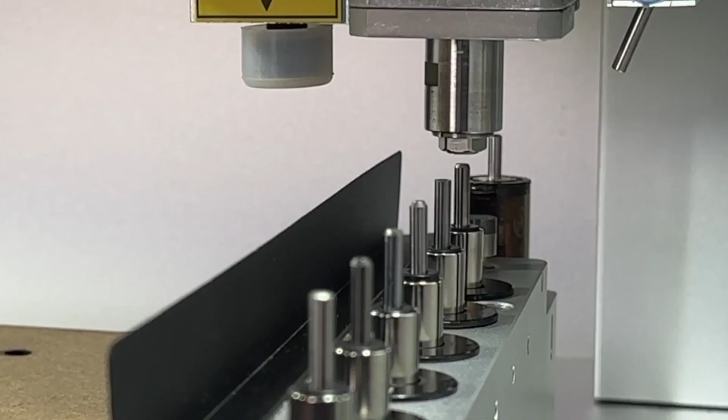In this one, we're looking at how to create a slide card style fidget toy using the Carvera and Makera CAM. Using the Fidget Toy Tool Kit available in our store, you can manufacture a wide range of fidget toys using your desktop CNC and the materials and bits included in this tool kit. Through this tutorial, we're looking at how to make a slide card style fidget toy, which will involve some intricate toolpath design for a multi-sided metal project.

You can choose to design your own CAD files for this project, or you can download the 2D CAD files that I'm using in this tutorial from the knowledge sharing page on our wiki site. You can, of course, download the CAM files from the wiki page too, but through this tutorial, we're going to look at how to create our toolpath step by step to make this project using Makera CAM.

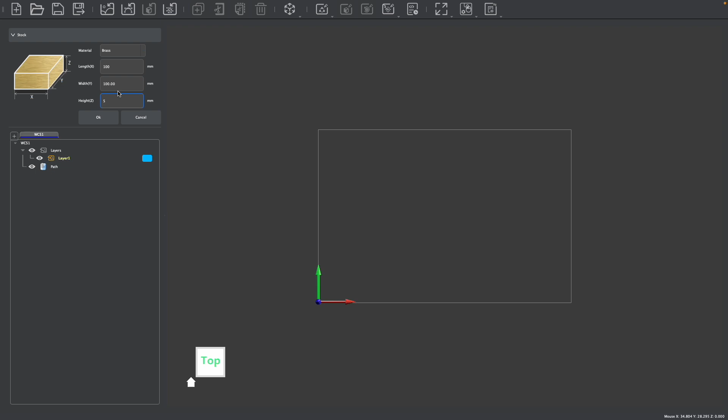So let's get started. After launching Makera CAM, the first thing we want to do is set up our stock parameters for this project. So we can edit our stock, and you can choose whichever material you're going to be working with. I am going to use brass, a piece of brass stock that's 100 millimeters in length, 100 in width, and 5 millimeters in height to create this fidget spinner from the fidget bundle pack that you can find in our store, as mentioned earlier.

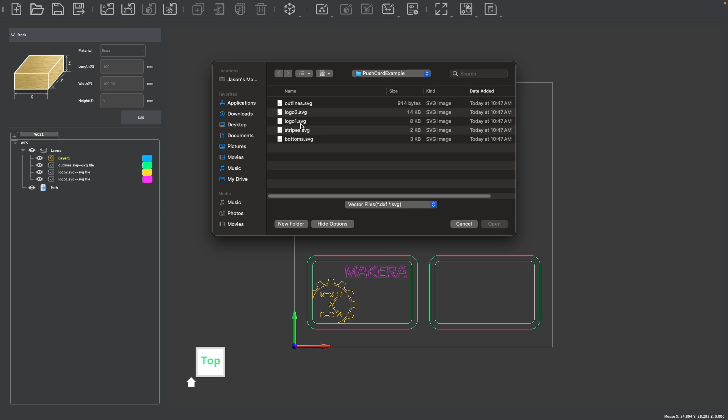After setting the stock parameters, we then want to import our files. There's a number of files that we're going to need to first create the top of this fidget card, starting with the outlines file, followed by the logo files, which there are 2, and then the stripes file. We won't need the bottom file for this side, but we'll get into that when we actually flip our stock over and manufacture the bottom.

Now you'll see that all the design files aligned perfectly because they were all designed together and then exported in a CAD program. But you could, of course, use center to center to align your design files if needed, as discussed in our other tutorial videos. Now, the first thing we're going to do is create our stripes, and the stripes are going to be manufactured using this stripes file.

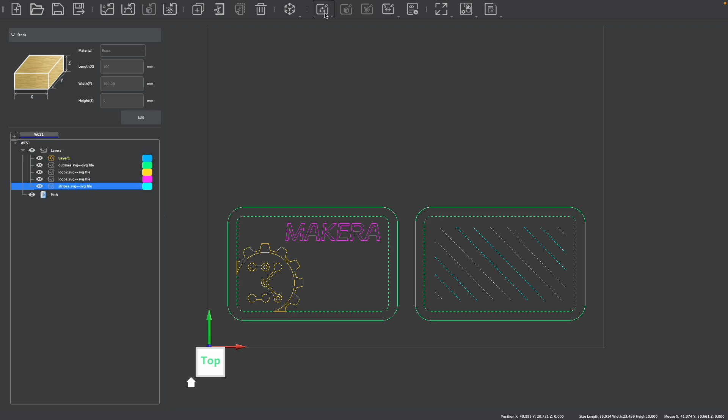You can select the entire design by hitting Select Graphics using the Layers panel here. And we're also going to create an outline stripe as well, so I'm going to hold Shift on my keyboard and select these 2 inner outlines. That's actually selecting things from 2 different layers, but that's perfectly fine as we want to create our toolpaths using the same parameters for these design features. So with the parts of our design selected, we can then create a vector contour toolpath.

And one thing that we're going to do differently for this project is we're actually going to start machining in the negative. So I'm going to start machining above my stock at negative 0.1 millimeter. The reason we want to do that is we want to ensure that our stock and our project is cut perfectly square.

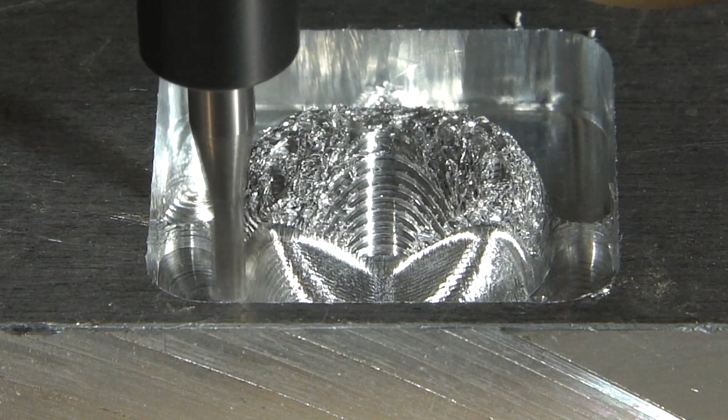In another video, we talk about how to use the Carvera's auto leveling feature, which will automatically adjust the Z height during machining to give you an even cut. But let's say that your stock is slightly uneven, not perfectly square, which is very common for extruded stock. Then the cuts won't be perfectly square. They'll actually be square in relation to whatever the deviation is on the surface of your stock.

By starting your machining depth above the stock, the Carvera will begin the toolpath above the stock and then gradually decrease into the stock, giving you a perfectly square cut based on the machine's square axis gantry. This is really important when you want to do parts that fit well together, like our fidget slide card. So we're going to start at a depth of negative 0.1 mil, above the stock, and we're going to do a depth of cut of 0.4 mil.

Now, you don't typically need to adjust your safe positions unless you have some type of jig or fixture that you're working around. For the tool, we're going to select our 1.5 by 6 millimeter end mill in our metal bit, and our parameters for brass should automatically be selected. In this case, we are not going to adjust any of these parameters. These are perfectly fine, but you might want to consider adjusting the tool number depending on where you have this tool loaded.

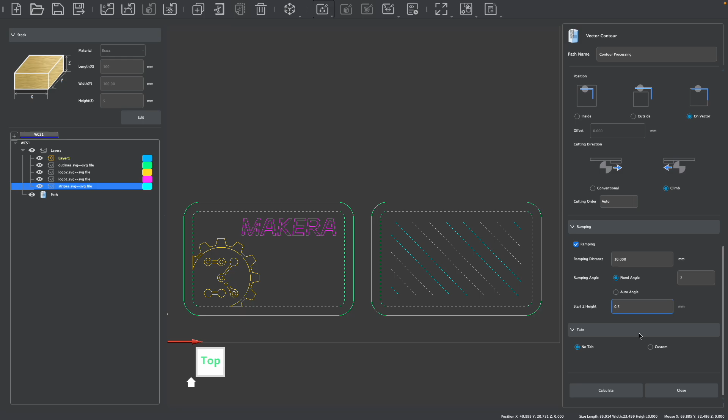So for ramping, a good distance is usually 10 millimeters for something like this. And we can do a fixed angle of 2 degrees and a start height of 0.5 millimeters. No tabs are needed, of course, because this isn't a contour cut that's going to go all the way through. So we can go ahead and calculate our toolpath, and we should be able to see our cut strategy, a nice little design cut there into our stock. Let's close this, and we can then move on to our next toolpath.

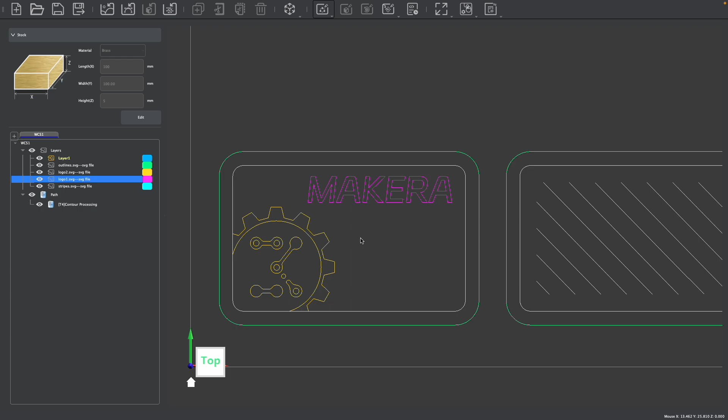And this one is going to be a pocket toolpath for our logo graphics. So we're going to select all the graphics on our logo layer. And in this case, one of the best ways to do this might actually be hide all your layers and your toolpaths except for what you need, and then go ahead and drag a box and select all the graphics across these 2 layers, like so. Then we can go ahead and create a vector pocket toolpath. So we can machine out this design using a pocket strategy.

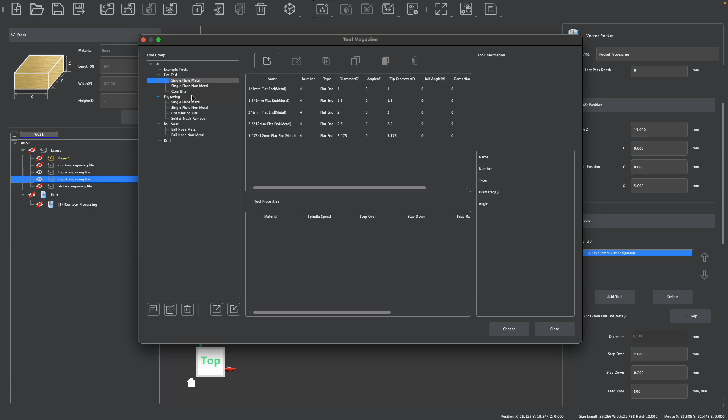Again, we're going to start above the stock, so negative 0.1 mil, and the end depth for this will be 0.4 mil again. We're also going to enable a last pass depth, and what that will do is essentially enable a finishing pass at whatever our step down is set for our bits as we go. Speaking of bits, we can go ahead and select a different tool. In this case, it's going to be an engraving bit for metal, such as the 0.2 millimeter by 30 degree V-bit, which would be perfect for machining a nice detailed design like this.

Again, our brass parameters will be set automatically based on our stock. You'll see that the previous tool that we were using is still here. That's if you did want to do a multiple clearing path or like a rest machining type path. In this case, we don't need to do that. So I'm going to delete this other tool so that way all I have is my 0.2 mil by 30 degree engraving bit. The default parameters should be fine, but again, you might want to consider adjusting your tool number based on where you have this tool loaded in your tool changer if you're using the Carvera.

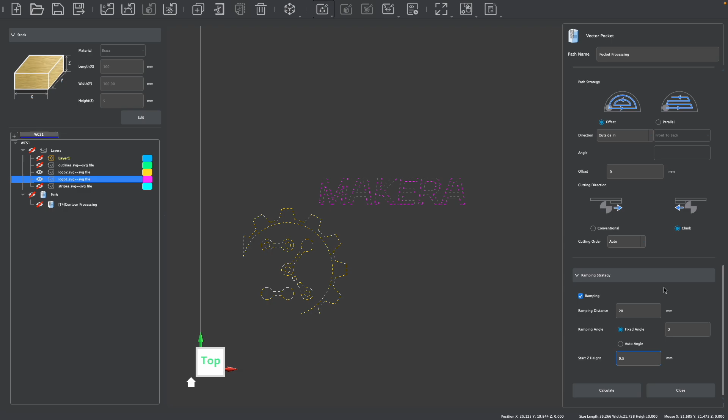For our strategy, offset and the default parameters of climbing should be fine. And again, we're going to enable ramping. This time we'll ramp for a slightly longer distance as we're working with a smaller bit here, and we don't want to break the tip, just to give us a nice, more gradual entry. So we'll set ramp distance to 20 millimeters, 2 degrees is still fine, and a start height of 0.5 millimeters is still fine, and a good general strategy for this. We can go ahead and calculate. And we can see our pocket path generated within these logo designs. So we can close this now.

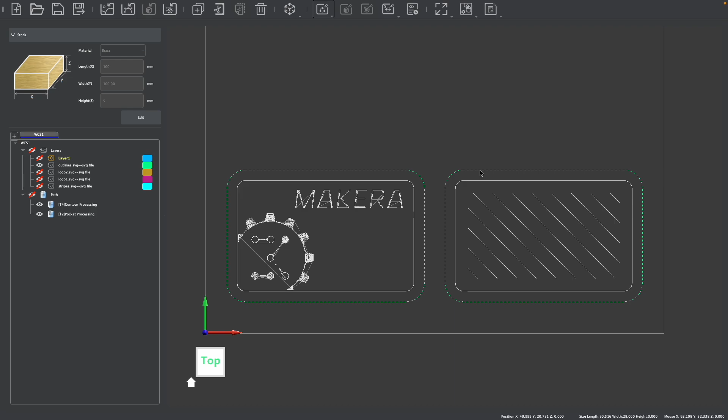And if you want, you can actually enable your contour path as well, so you can see how the 2 toolpaths we've created thus far will align. And I'm going to go ahead and hide our logo design files because we won't be needing them. And then we can enable our outlines design file because the next thing that we're going to do is follow along with this outline and begin to cut the outer perimeter of our fidget toy. We're not going to cut all the way through on the top because we are going to flip our stock over, but we're going to begin to cut in so that way we can create a nice chamfered edge for the top. And then through some alignments, we'll be able to make sure that the top cuts align with the bottom cuts. So let's select our 2 outlines and then create a new vector contour toolpath.

Again, we're going to start from a depth of negative 0.1 above the stock. This time our end depth can be 1.5 millimeters. So not all the way through, but deep enough that we can start to cut the outer edge. For our tool, we can switch to a larger tool, such as a 3.175 by 12 millimeter flat end mill with brass set as our machining parameters.

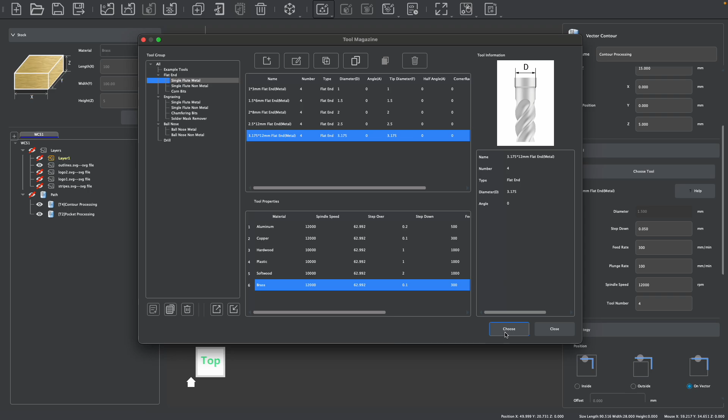Our default parameters should be fine for brass as we work here, but you do need to change your tool number if you have a tool number set that we've already used. So for example, I'm using tool 4 for my smaller flat end mill. So I'm going to switch this one to be tool 5 as you go. And that's important to do whether you're using the Carvera with the automatic changer or even the Carvera Air, so that way a tool change will be prompted to a different bit.

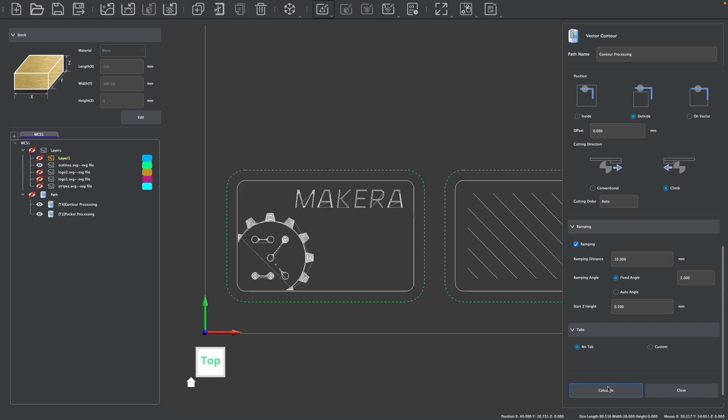For our strategy, we're going to run along the outside of the contour. No offset and climb is fine. And again, we will have ramping enabled, and we should have our default parameters that we set earlier on with a distance of 10, an angle of 2, and a start height of 0.5. So let's go ahead and calculate this, and we'll see that we have this outer cut set. And if we rotate, we'll see that we don't go all the way through, but we cut deep enough that we can start to machine a chamfered edge as well.

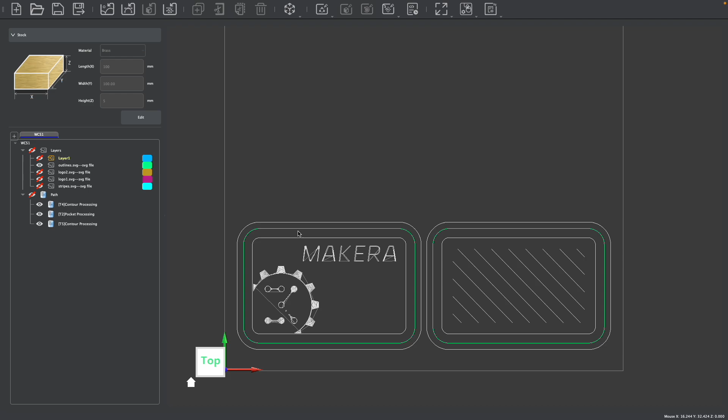Now, the last thing that we have to create for the top of our design in terms of the fidget toy is a chamfer to give us a nice smooth edge to work with. So let's go ahead and select those same outlines again. And let's go ahead and create a contour toolpath again. And for this one, the start depth is actually going to be within our stock because we've already begun to manufacture this path. So we're going to set a start depth of 0.2 and an end depth of 0.6.

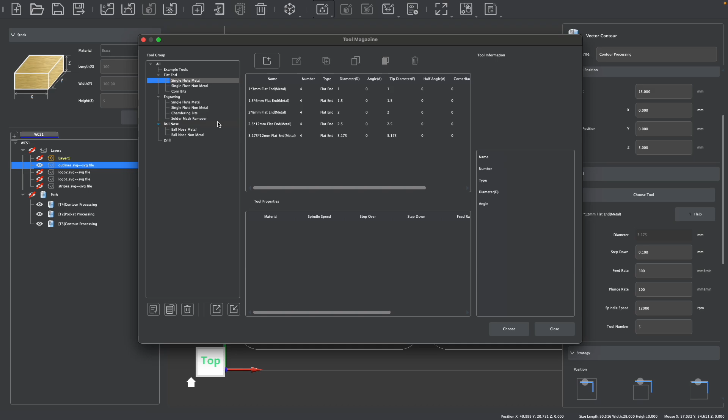For our tool, we can go ahead and select our chamfering bit, which in this case will be a 0.1 millimeter by 90 degree chamfer from our examples pack with brass set as our default parameter. The default feeds and speeds should be fine, but check your tool number to make sure you're in a different slot. And the key about a chamfer is you typically want to run along the outside of your toolpath like a contour cut, but you also need to offset the chamfer bit. The edge of the bit will be over the line, and that's what creates our chamfer cut. And this offset is what can set the size or the depth of your chamfer.

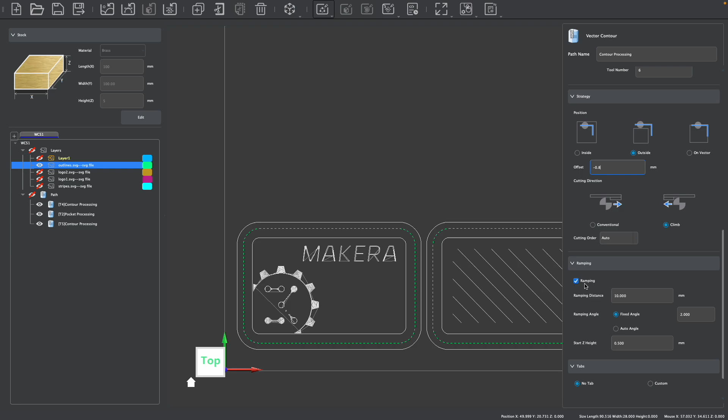So for example, we're going to offset negative 0.8 millimeters, which should give us a nice even and small chamfered edge for the size chamfer, or 3.175 millimeter diameter chamfer bit that we're working with here. Climb is fine, as with before. And for the chamfer, we actually don't need to enable ramping. Once we calculate, we can see our chamfering bit running along the inside of our line here.

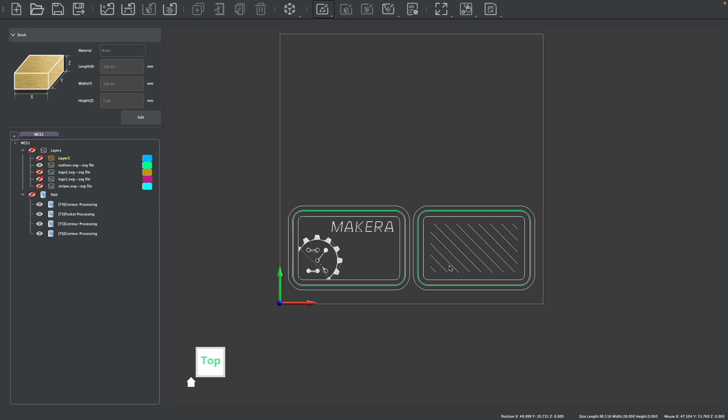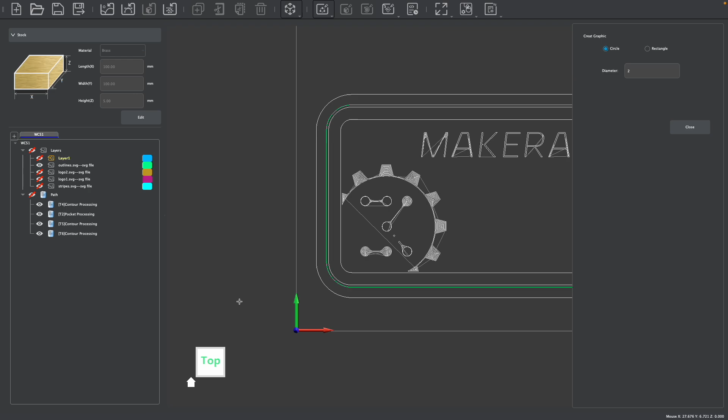All right, now the last thing that we need to do for our top side of this project is to give us some alignment pins, so that way when we flip the stock over, we can be confident that the stock is aligned with the top design and the bottom design, which is super important anytime you do a multi-sided project like this. So we're going to use the Makera CAM create feature to create some holes that we'll put alignment pins in later. The diameter of these holes can be 2 millimeters, and the position of the first hole is not important. So we can go ahead and just draw it somewhere in this lower corner here, like so. And you'll see that this was drawn on our first layer, which was the active layer.

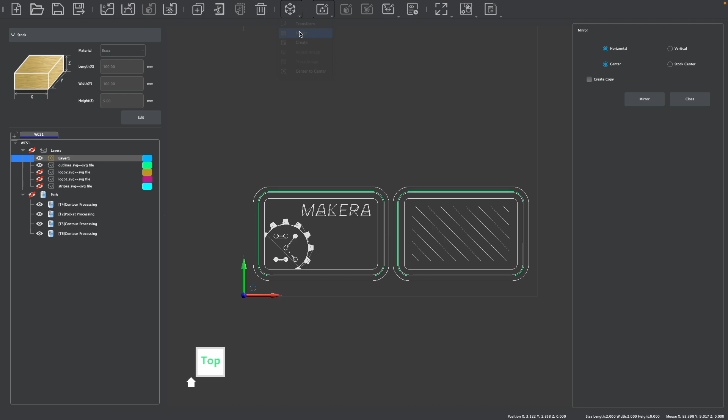Now, we need a second hole on the other side of the stock. And there's a couple ways we could do this. We could actually transform this hole using the transform window and set the position to be specific off the corner, and then kind of do some math to make sure it's in the exact same position on the other side. But there's a much easier way to do this in Makera CAM, and that's by using the mirror tool. So what we're going to do is we're going to mirror this hole, but rather than mirroring it off of its own center, like the center of the hole, we're going to mirror it off of the stock center.

So that way, this is going to find the center of our stock, and I'm going to click Create a Copy, and when I hit Mirror, a second hole is going to come to the other side, the right-hand side of the stock, and it's in exactly the same position based on the size of my stock. So that means as long as I machine this project on a piece of stock that is 100 millimeters in width here, when I flip this stock over, my designs will be perfectly centered based on these alignment holes. Now, with our holes drawn, we can select both holes and create a vector drilling toolpath.

For this, we can set our start to be 0 millimeters. That's perfectly fine. Our end depth is going to be 10 millimeters to give plenty of space for the pins to slide through. And this, of course, will not only go through our 5 millimeter stock, but it will also drill 5 millimeters into your spoil board or your waste board. So make sure that you have a piece of waste board to protect your bed accordingly.

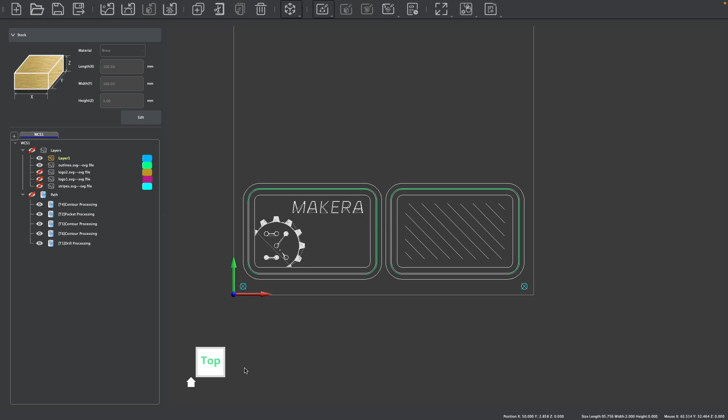We can go ahead and select a 2 millimeter drill with our brass properties selected here. And the default parameters are probably fine, but go ahead and check your tool number to make sure that you have this in the correct location. And we also want to do a retract path. So this is like a peck drilling function. And we can do this from a relative retract distance of, let's say, 2 millimeters, which just means that each drill pass will then back up or retract by 2 millimeters to allow for chip evacuation to make sure that we don't dull or break our bits. We can hit calculate, and then we see our drill path drawn there.

So this concludes the top of our project. So this will manufacture the design and the chamfer and everything like that on the top of our fidget project. And then what we need to do is flip the project over to manufacture the bottom. And you could do this in 2 separate CAM files, but we're going to do it in just one.

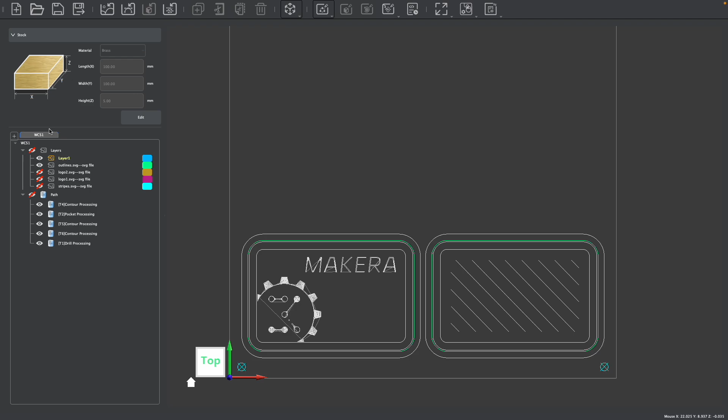So the first thing we have to do is make a new work coordinate system for the bottom of our stock. So to do this, we can press this plus button here to create a new coordinate system, which I'm going to call bottom. And then we need to select the origin point for the bottom coordinate system. And you can see that the default origin point is, of course, the bottom left corner here. So we want to select what the bottom left corner will be after we flip our stock.

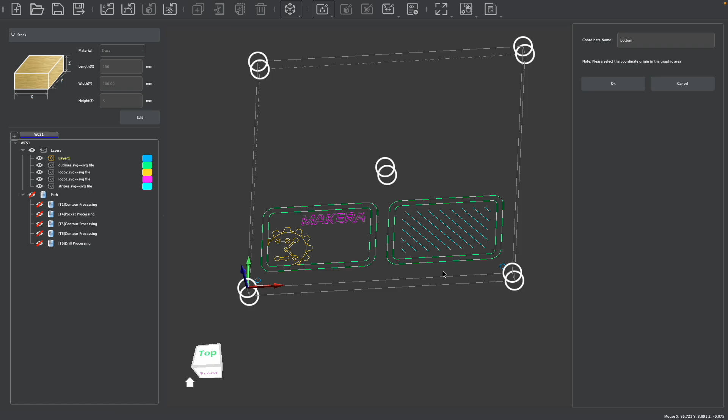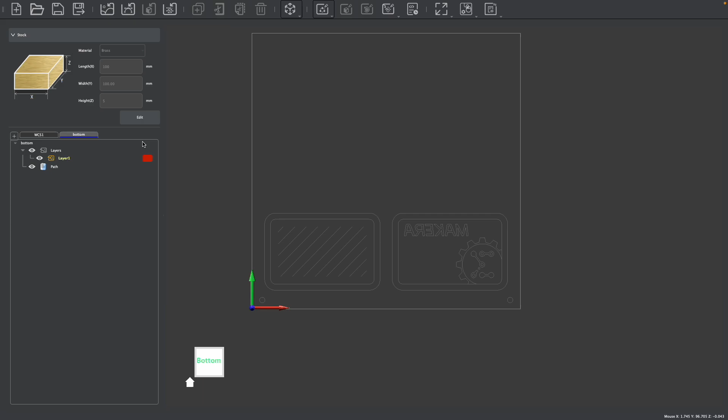And if I rotate my stock around in a horizontal direction like this, which is how it's going to be flipped, I can see that this corner will actually end up being the bottom's bottom left. So we want that to be our origin point for our new WCS. And when we press OK, we can see that we've created this bottom WCS, and we can sort of see a shadow of our designs from the top. And I can toggle back and forth between the WCS accordingly.

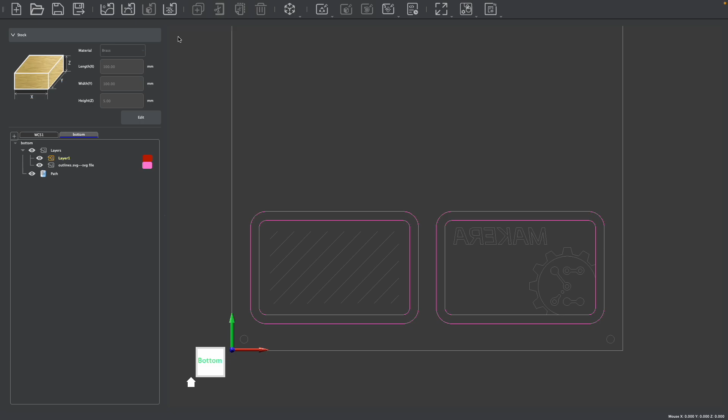So now we need to import the design files for the bottom of our fidget toy. And for this, we're going to need the same outline file that we used earlier. And we're also going to need the design file called bottoms. And again, because these design files were made together, they should align with the tops just fine. But if needed, you could use the center to center feature to align, as discussed earlier on. And now we can move into actually preparing the toolpaths for the bottom.

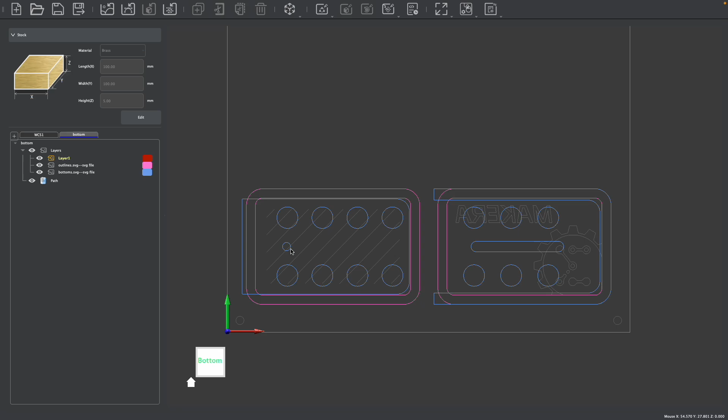So the first toolpath that we're going to create is actually just for this little post here that we can see on the left side. Now this post is going to be what slides in this channel to lock the two pieces of our fidget toy together. And all we need to do is remove a little bit of height off of this post so that way it fits within this groove. So we don't want it to be the same thickness of the stock, so we just have to machine a little bit of material off.

So we've selected this hole and we're going to create a vector contour toolpath. Our start depth is again going to be negative 0.1. So we start machining above, and we can do an end depth of just 0.3. So that's just going to remove 0.3 millimeters off the height of this post. We can choose our single flute bit that's 3.175 by 12 mil. Again, our parameters will be preset, and we shouldn't have to adjust anything here apart from our tool number.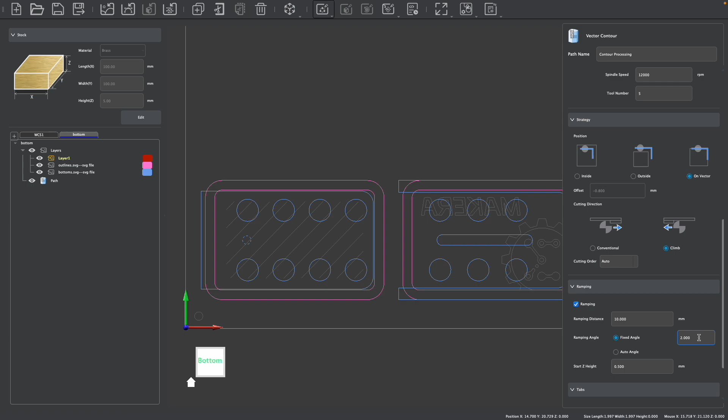Earlier on the top part of this project, I set this to be tool 5, which I'm going to do again, so that way I don't have to move the bits around in my tool changer when I flip my stock around. We can set this to be on vector, just so it will run along the side of this post. And just like before, we can set ramping at a distance of 10, an angle of 2, and a start height of 0.5. After calculating, you can see that it's just going to manufacture this little post here, which again will just remove some height off of our material. Next, we want to go ahead and manufacture this pocket on the left side of our stock.

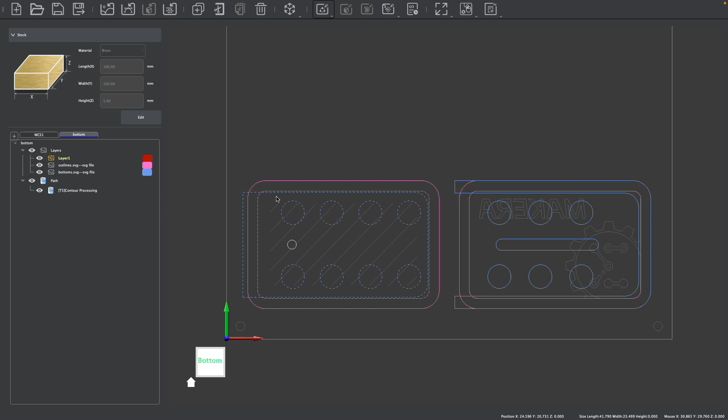So to do this, we're going to select everything on this side, like so. I don't want to grab the outline design part here, just the inner part of this pocket. So I'm just going to hold Shift and deselect that one aspect of the design. And then we can go ahead and create a pocket toolpath.

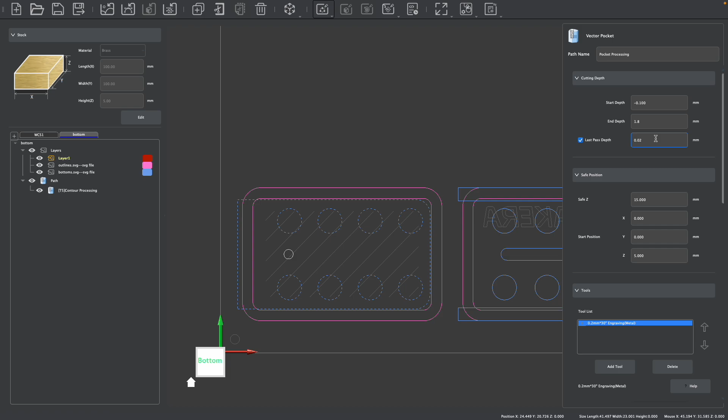We're going to start from negative 0.1, but we're going to end at 1.8 millimeters. We're also going to enable a last pass depth, which again, as we discussed earlier, is sort of like a finishing pass, to 0.02. So that's going to give us a really nice fine and smooth cut here, which is important because this part's going to have to fit in with this part that we machine later.

The tool that we're going to select is going to be our 3.175 by 12 millimeter bit, which we again want to set to tool 5. And that's going to start our clearing path. We don't need to use our engraving bit if you have this already there. So I'm going to delete that. So all I have is my 3.175 by 12. And that's going to start this.

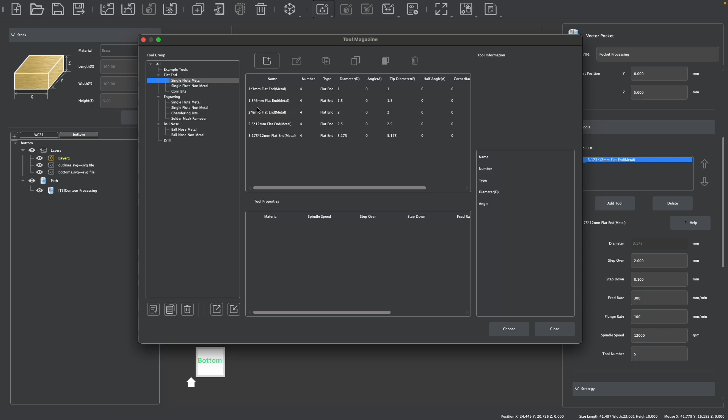But this bit is too big to fit into the fine details, into the corners for this. So we're going to add a second tool. We'll grab our 1.5 by 6 millimeter tool, which is set to tool 4. And this will be selected after most of the material has been cleared out by the larger 3.175 bit. And then the smaller 1.5 millimeter bit will just be used to clear out all the sharp corners and things and actually do that finishing pass that we set earlier.

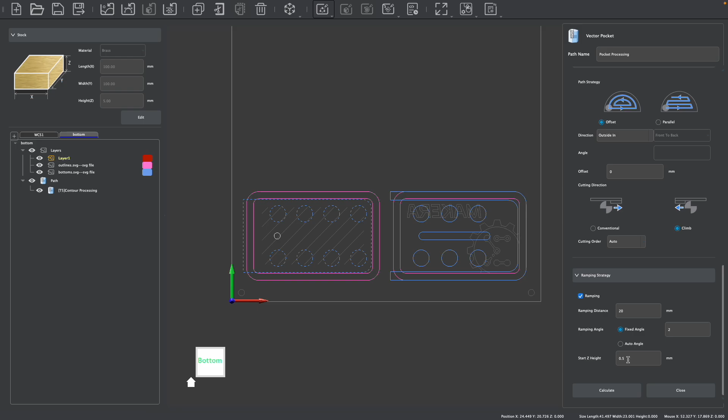So the default parameters for both these bits should be fine. Just make sure that you have the correct tool number selected. Our path strategy is going to be an offset with outside in and climb. The default is perfectly fine. And we do want to enable ramping. And because we're using a smaller bit, we can do a larger ramping distance. So 20 millimeters at 2 degrees for a height of 0.5. So this will go ahead and clear out our

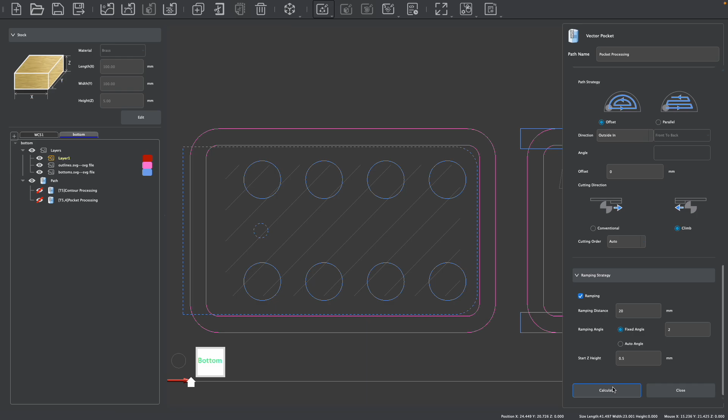path here. And actually, I made a mistake with this. What I did was I selected my magnet holes. I don't actually want to do that. By doing that, the magnet holes are not going to be cleared. So I want to select just the outline of this as well as my post. So let me just hide this here. I'm going to select the outline and my post, and then let me recalculate. And then what you can see is that this entire path was cleared, magnets included, everything was cleared apart from the post.

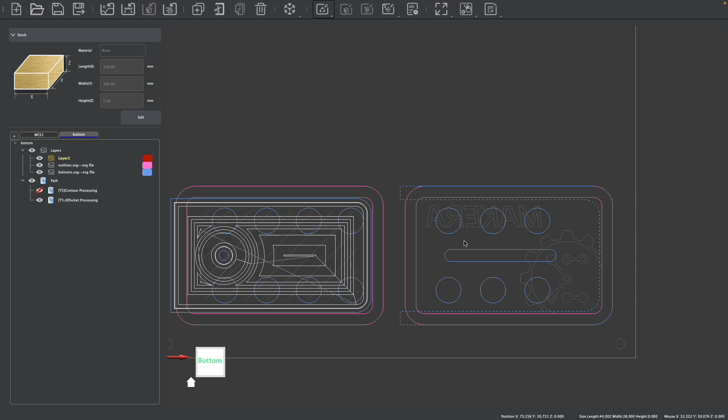All right, the next thing we can do is start to clear out the material on the right side of our fidget toy. The first thing we're going to do is clear out this large outer perimeter piece here. So I'm selecting this sort of U piece. What that's going to do is machine material away from the outside of this piece of the fidget card. And that's going to allow us to slide the two fidget cards together as we've machined a pocket on this side and an outer path on this side. So what's left on the right side will fit in what's been removed on the left side here.

So after selecting this, we can go ahead and create another vector pocket path. For this, we're going to do a start depth of negative 0.1 again. Our end depth isn't going to be quite as much. We'll do 1.5. That way there's a little bit of a gap between what we've removed on both sides to allow the two pieces to fit through. We are going to enable our last pass depth of 0.02 for a nice finishing pass.

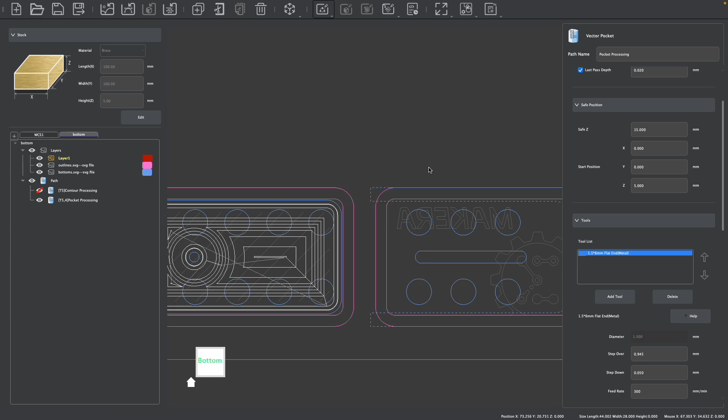In this case, we only need to use the smaller bit. So I'm going to remove this 3.175 by 12. That way all I have is my 1.5 by 6, because we need to fit within this slightly smaller area here, and the larger bit won't do that quite so well.

However, we can adjust our parameters a little bit. So we can reduce our step over a bit. I'm going to change this to 0.4, and that is going to make this take a little bit longer because my step over isn't quite as big, but it's also going to give us a more gentle cut and reduce the wear on our bit here. The other parameters should all be fine. We do want to change our path strategy to inside out, so that way the bit will start on the inside and work its way out to give us nice, clean, sharp corners, and again, reduce the overall wear on our bits.

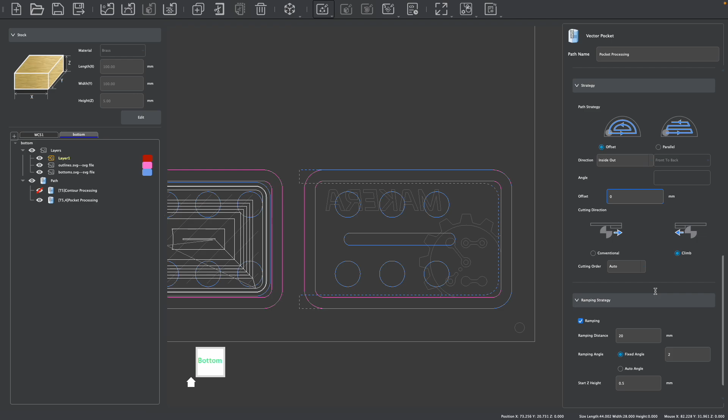And again, you want to make sure that you have your ramping set, just like we did before. Next, we're going to do another pocket, and this one's going to be this inner groove cut on the right-hand side. So we can select this inner groove and then create another vector pocket.

We're doing this with very similar settings to the one that we just did, but the reason that we didn't do these two paths together, this outer U and this inner pocket, is because we need to have different depth. This center groove needs to be deeper than this outer groove because this is where our peg, our little post thing that we cut earlier, is going to fit into. So our start depth is going to be the same. Our end depth is going to be 1.7 millimeters.

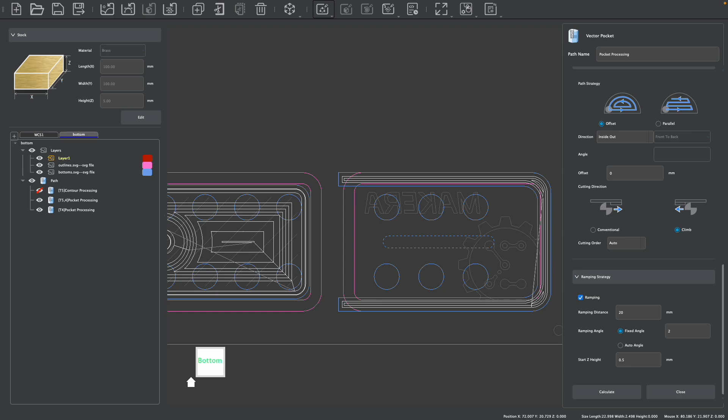And again, we can enable the same last pass finishing. We can also enable our 1.5 by 6 bit again. I'm going to readjust the step over to go back to 0.945, which is the default parameter, just to give us a slightly faster machining pass for this inner pocket here. And all the other settings that we used earlier, offset, inside out, and our ramping strategy should still be applicable for this toolpath.

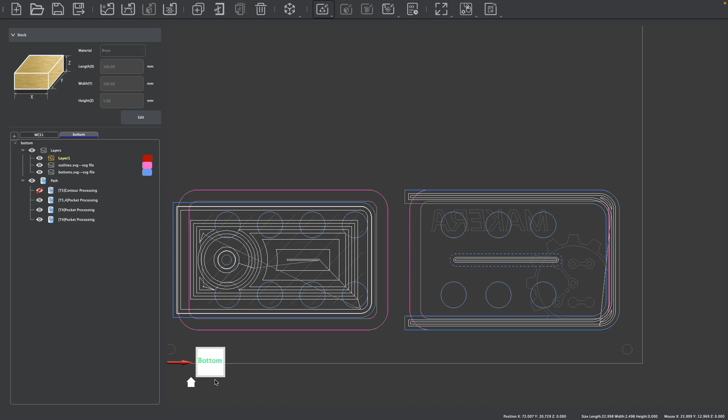All right, so we have our pocket cut out on this side. We have our outer perimeter and inner pocket cut on this side, which should allow these two pieces to fit together. The next thing that we have to do is manufacture our magnets, so all these little magnet holes as we go here. Now, we could choose to manufacture these magnet holes together on a single toolpath, but we can actually save a little bit of time if we do it separately because the magnet holes on the left side have already been surfaced, right?

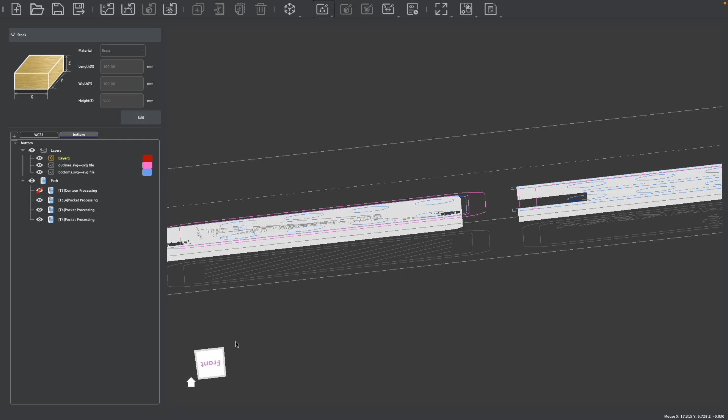So the magnet holes are already down here on this side below this pocket path that we've already started to machine, while the magnet holes on this side are a little bit higher up because we haven't machined the center of this. So if you did the toolpaths together, they would all start machining from the same height, which means that this left side would be machining with no stock until it actually reached where this pocket was already cut. So because of that, we're actually going to do two toolpaths, one for the left side, one for the right side. They're going to be almost the same settings, just with different starting and end depths based on where the magnets fall.

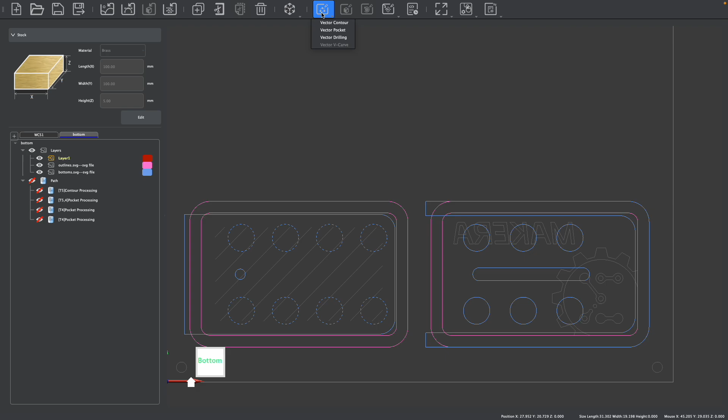So just to clear this up a little bit, I'm going to hide all the paths that we've already selected. And then I'm going to select the magnets on my left side by holding Shift, and we can create a pocket toolpath. The start depth is going to be within the stock, 1.8 millimeters, because we've already machined down to that depth. And the end depth is going to be 3.9 millimeters into our part.

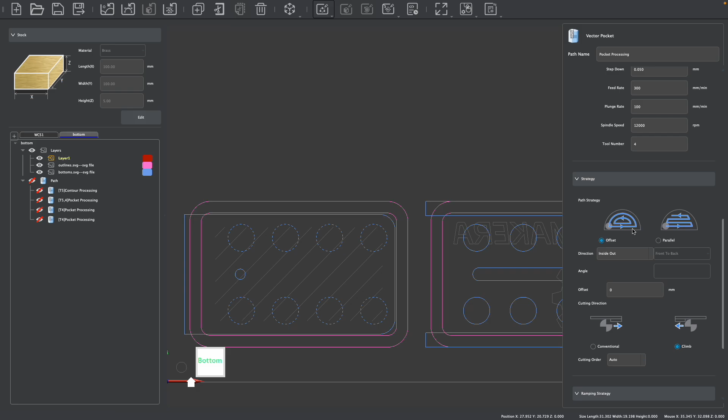Last pass is going to be enabled, so we get a nice clean finishing pass for this. And we can make sure that we have our 1.5 by 6 millimeter end mill. And the default parameters, default step over, all of that should be fine for this pocket path, as can our offset with inside out be selected and our ramping, just like we did before. So I'm not changing any of these things. You should still have these same settings from the last pocket path that we created.

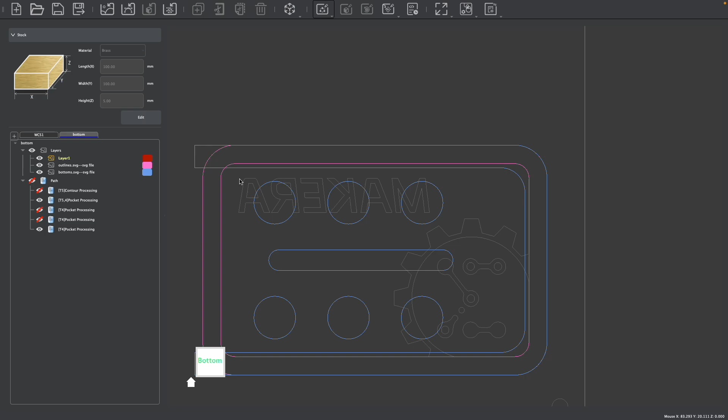So you can see that we have our magnets, and you can also see that this toolpath starts in the stock. And if we enable this pocket, you'll see that that magnet toolpath starts where that pocket path machined to. Now let's close this and select the magnets on the right side and create another vector pocket toolpath. We can change our start depth and our end depth.

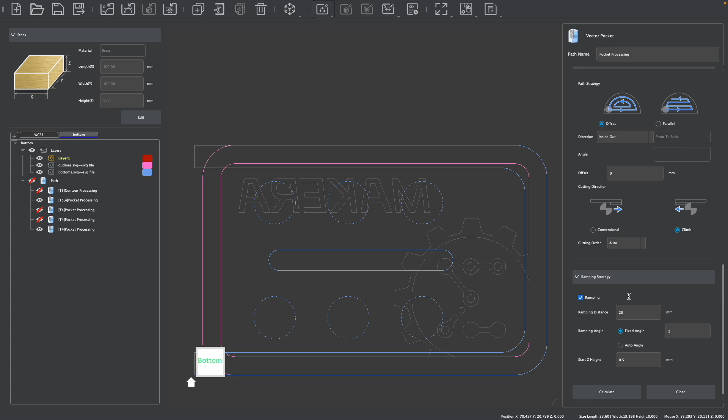In this case, we're starting from the surface, so we're going to actually go above the surface, negative 0.1, like we did before. And the end depth for this is going to go to 2.1 millimeters, so we have enough material machined out for our magnets here. All the other settings should be perfectly applicable and should still be here from the last pocket that we created. So our last pass depth, our tool parameters and number, our strategy, and our ramping. So now we've created the magnet holes on this side.

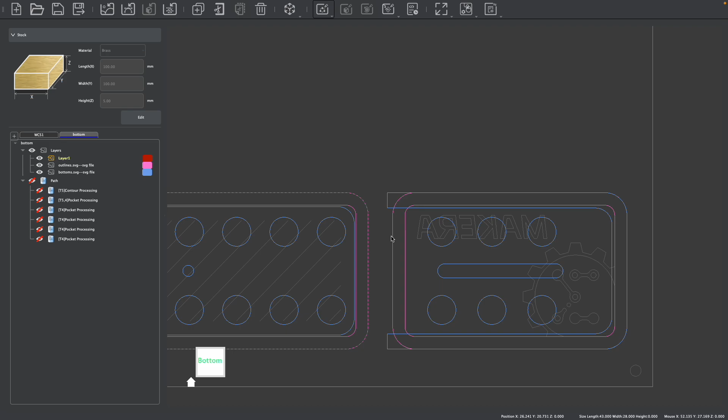Now, if we show all of our paths, we have nearly everything we need, apart from actually cutting out this part. So we actually need to cut the part to release it from our stock. So let me hide everything here. And for this, we're just going to select the two outermost perimeters, which is of course what we use to start the outline path on the other side of our stock. And we can create a vector contour toolpath.

Our start depth is going to be negative 0.1 because we'll be machining material and we want to make sure this is nice and square, as discussed earlier. The end depth is going to be 5 millimeters, so we can cut all the way to the bottom of our stock as we go. And if you want, you can do something like 5.1 millimeters just to make sure that you do manufacture all the way through the bottom.

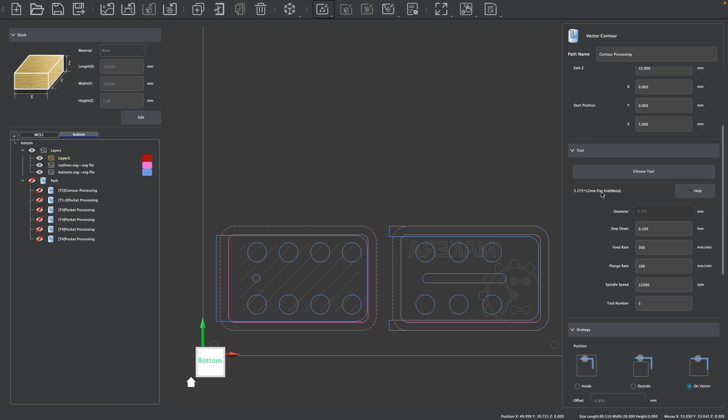We'll use our larger 3.175 by 12 millimeter tool, which is set to be tool 5. Our default parameters should be fine. For our strategy, we're going to do outside, but with an offset of negative 0.17 millimeters. And what that lets us do is run along the outside, but bring our bit inwards just a little bit. And this helps when you're flipping your material over.

So that way, if your alignment isn't perfectly square, you'll machine a little bit of material away from the outer cut that we did on the top, just so that way your design will still line up. You'll remove any excess material just by a small margin here, just in case your alignment isn't perfect when you flip your stock over. We want to enable ramping just like we did before because we're working with a larger bit. We don't need to do such a large distance. 10 millimeters is perfectly fine.

And you have the option of enabling tabs and putting tabs in along the outer perimeters here. But for a project like this, we recommend that you use double-sided tape that I'll show you in just a minute to secure your parts, so that way you don't have to cut the tabs away, and especially when you have a design that has edges which are crucial for things to fit together, they'll give you a nice cleaner and higher precision cut than having to cut tabs away manually after the fact.

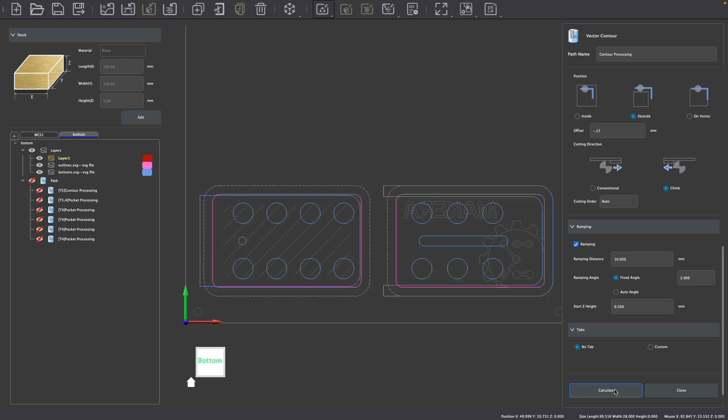So we can calculate this, and if I enable all of my paths and hide my layers here, we can see our paths for the bottom. We can then flip back to the top, and I'll do the same, and you can see your paths for the top, and you can actually see how they interact with one another because we get the shadow between the two work coordinate systems here.

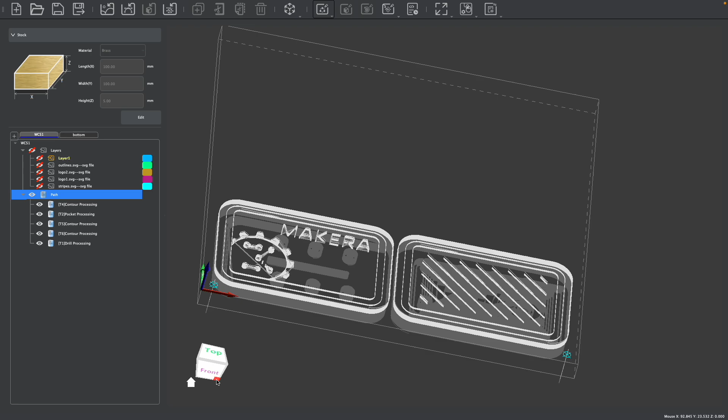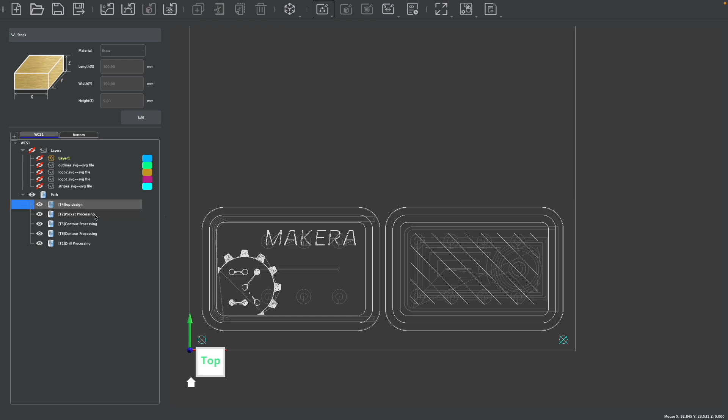And this looks good. The one thing that we didn't do, and it is good practice, is you could always rename these paths. As you can see, we have a lot of repetitive contour processes. So you might find, especially if you go back into a project and you modify things and you tweak things, never be afraid to go ahead and actually rename these different paths like this, so that way you know what's happening in each toolpath, which just makes organizing your design a little bit easier to go back and manage. And I'll make sure that I do that and label all these things in the design file that's actually shared with you.

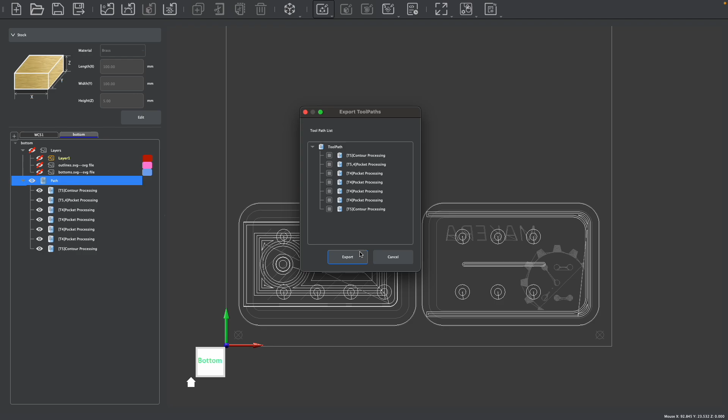So with everything designed here, what we can do is right-click and save all of our toolpaths. So we're going to do this in two files. So I'm going to save all of these toolpaths together. So I'm going to save this as top paths, and I'll save that to my computer. And then I can switch to my bottom, and I'm going to select and save all of these paths as bottom paths, and again, save that to my computer.

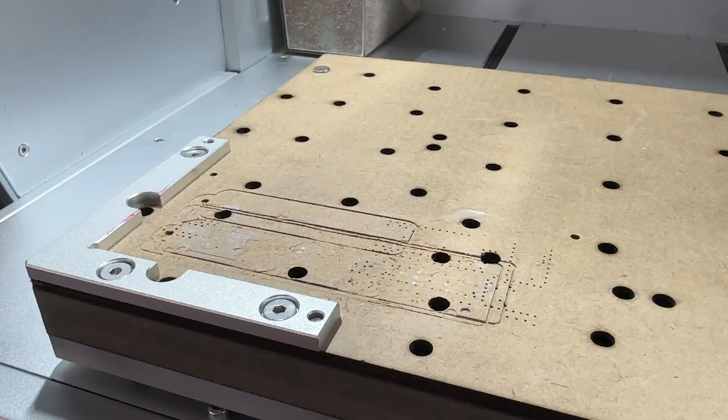Now with our G-code files prepared through Makera CAM, it's time to set up our CNCs for manufacturing. We can start by securing the stock to the bed of our CNC and make sure that you have a piece of wasteboard below your stock, as we will be machining all the way through the stock for the alignment holes and to cut the part out later on. And if you're using the Carvera, you also need to make sure that your tool changer is loaded with your bits in the correct order based on our CAM file that we made earlier.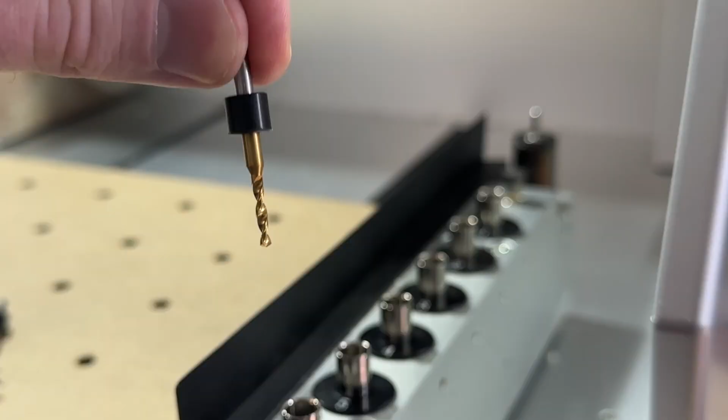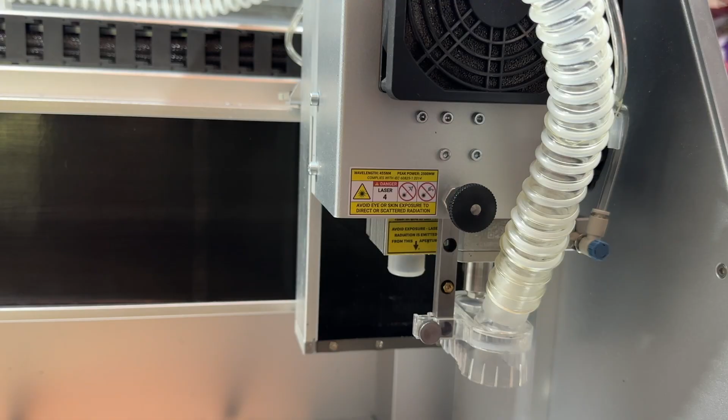For this project, our drill should be in slot 1, the engraving bit should be in slot 2, our 1.5mm end mill should be in slot 4, the 3.175mm end mill should be in slot 5, and the chamfering bit should be in slot 6. We also typically don't use the dust shoe for metal and instead use the air assist module for chip evacuation and cooling, though this isn't always required.

Now with our machine set up, we can open up the Carvera controller app to actually configure our G-code files to manufacture this project. So after uploading those 2 G-code files to the Carvera, we can start by loading the top paths file. In our config and run window, there's a couple things we want to do. First off, you can select your work origin. So if you did want to offset this to leave room for clamps and things, you can.

But you need to make sure that this offset is equivalent on both sides, because you have to remember that we will be flipping the stock. And in this case, when you're flipping the stock, it is best to set these offsets by manually positioning your material on stock in the CAM software. Scan margin is always a good idea, so we'll enable that so that way you can make sure that there's no clamps or fixtures that will be hit or obstructing our toolpaths.

Auto Z-Probe can also be enabled. This will check our general stock height. And as discussed earlier, we don't want to enable auto leveling, as this will give us an even cut, but that will be based on any defects that we might have in our stock thickness. So with all this set, we can go ahead and click Run to start this top job.

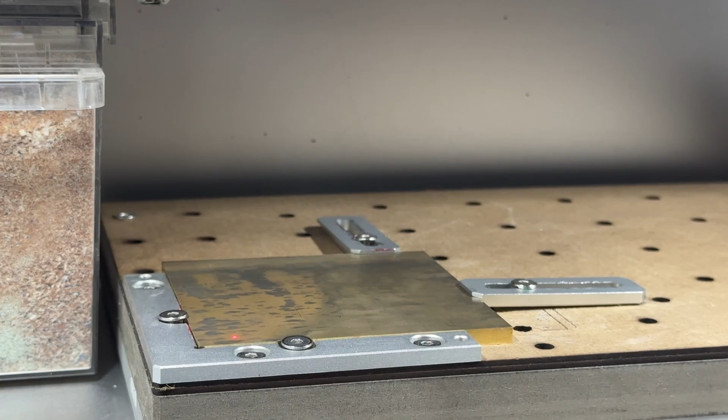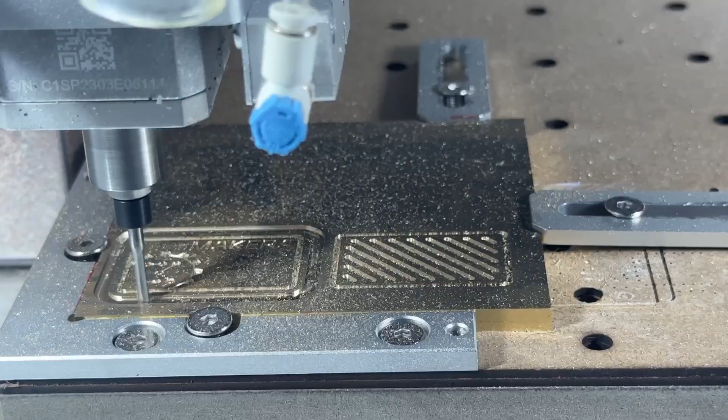After pressing Run, the Carvera will start by tracing the perimeter of our job through the scan margin feature. Ensure that no clamps or fixtures are obstructing your work area around the scan margin. The surface will then be probed to determine the height of our stock before selecting the first tool. Our CNC will then move through each toolpath we created earlier in our CAM program, first by machining the top design and logo, before moving on to the outer perimeter and chamfer toolpaths.

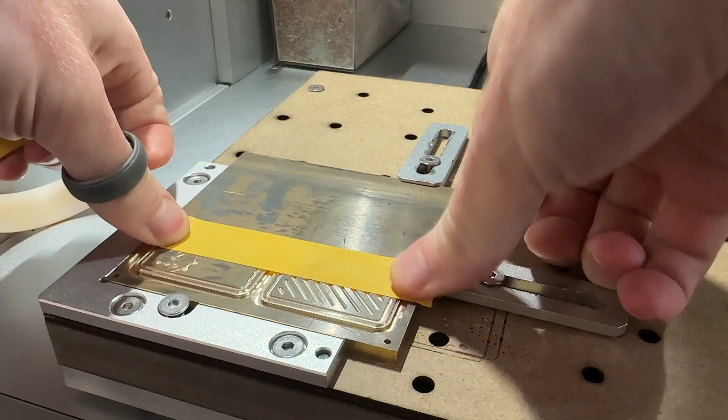If you're using the Carvera, tool changes will be automatic between each toolpath, while the Carvera Air will prompt you for a manual tool change. Once the top is finished, we can vacuum away any excess chips, then apply double-sided tape to our parts if you chose not to use tabs in your design like me.

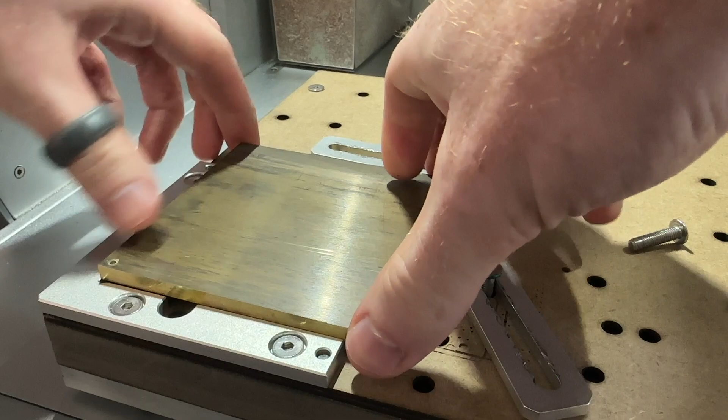But before we flip our stock over, we need to insert the alignment pins included in the toolkit before removing the stock. These alignment pins should slot firmly through the stock and into the piece of wasteboard that we drilled, allowing for an accurate horizontal flip of our stock based on our CAM file. After flipping the stock over, you can remove the alignment pins and press the stock firmly down to adhere the parts to the bed using the tape that we applied, and then of course secure the stock using top and corner clamps just like we did earlier on.

After selecting and loading the bottom path file, we can go ahead and go to our config and run, and we're going to do the same settings that we did earlier. So making sure that our work origin offsets are the same or non-existent to make sure that our parts align, enabling scan margin just to check our positioning and our clamps, enabling auto probe just to set our stock thickness, and again, we don't need auto leveling here.

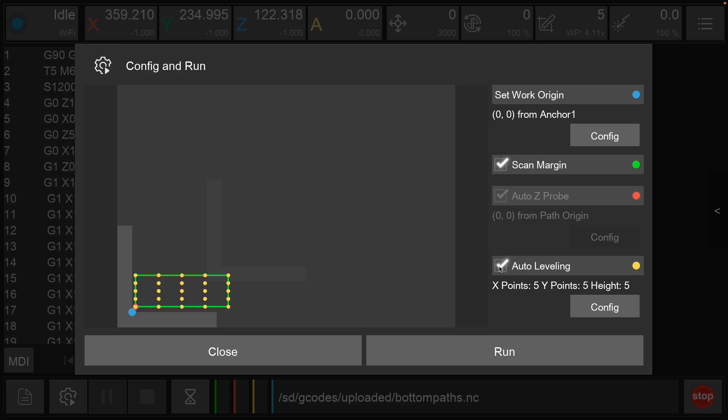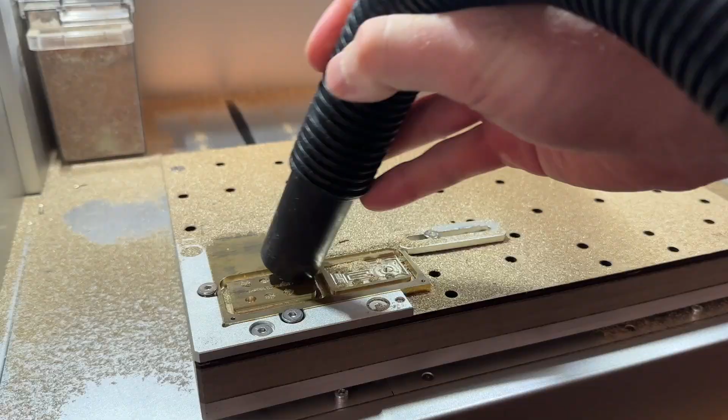The Carvera will again trace the perimeter and probe the surface of our stock before moving through the toolpaths to manufacture the bottom of our designs, starting with the peg and pocket toolpaths before machining the magnet holes and then the outer contour cuts. Once finished, we can vacuum away any chips and dust and then remove the clamps to peel the stock and parts off of the bed of our CNC. Be careful, as there may be some chips and sharp burrs attached to the tape, which can be peeled away from the top of the parts.

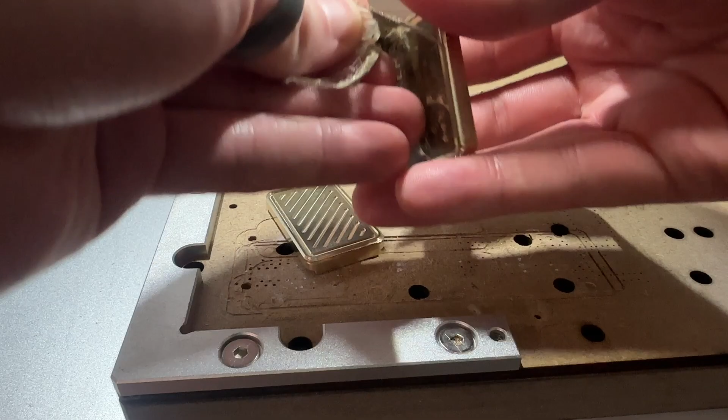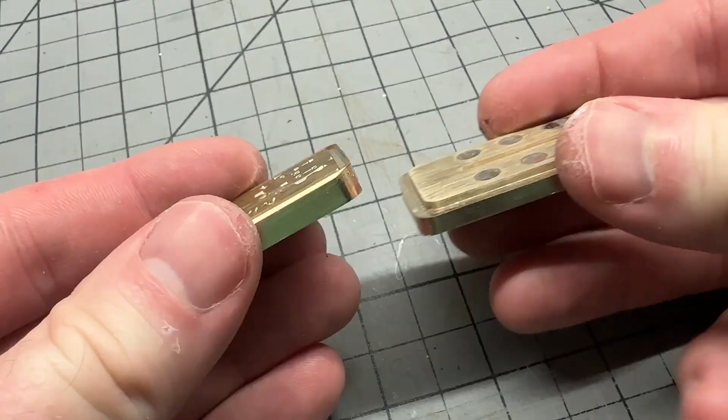After checking the fit of our parts, we can sand the edges to remove any burrs and clean up any unfinished surfaces. And then to make this slide card work properly, we need to add the magnets to this project, which are included in our toolkit. You can use super glue to install the magnets, but I recommend you don't glue all the magnets in at first. The number of magnets used will change how your slide card reacts, and you can add as many magnets as you want to increase or decrease the responsiveness of your fidget toy based on your own liking.

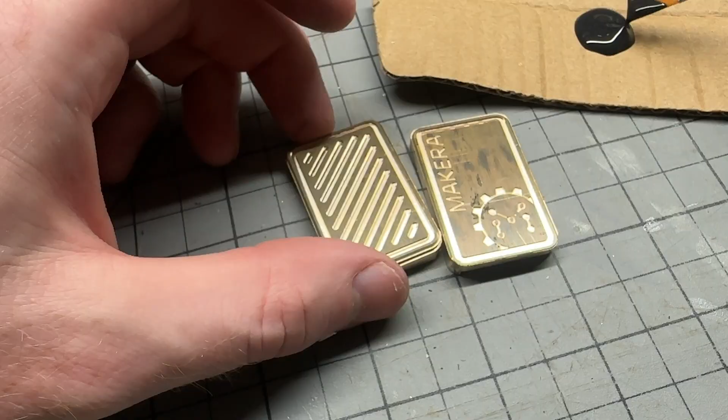But the project doesn't need to stop there. We can also add paint to create a multicolored project like this. You can paint the surface of each part, ensuring that the pockets are filled with paint evenly. After the paint dries, sand the surface to remove the paint from the high spots and only leave it in the pockets to give you a nice two-color design with a brushed metal finish using the sanding blocks included in the toolkit.

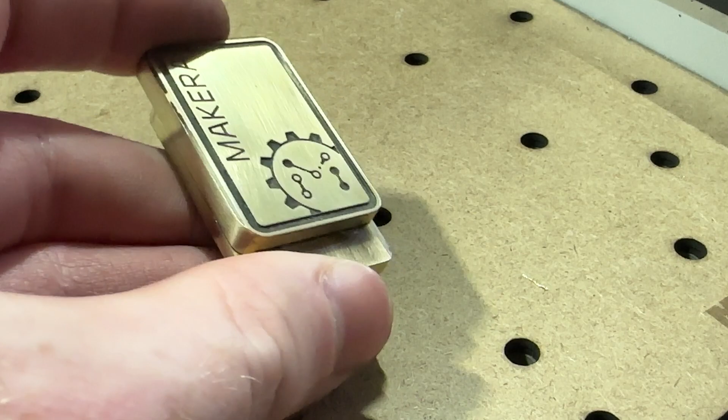And there you have it. There are, of course, many different ways to create a fidget toy, and many of the processes and techniques shown in this tutorial are universally applicable to these different types of projects.